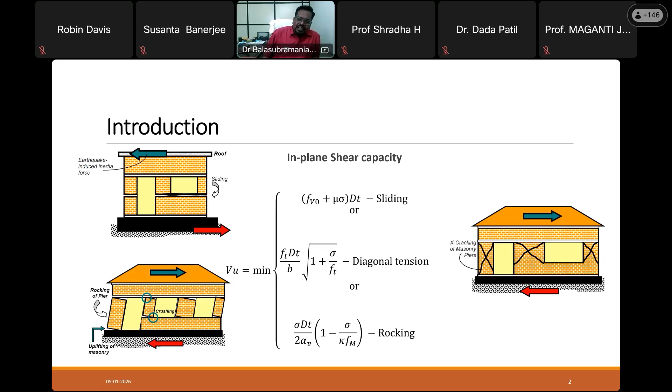These are expressions available in Eurocode, but the basic mechanics behind this failure is as explained.

Now getting into the topic, we need some mechanical properties to properly engineer a structure. On one hand we have the force that's coming, and on the other hand we have some resistance capacities. To understand the resistance capacities, we need determination of the respective strengths. So this determination of mechanical properties is important in the case of seismic analysis.

For seismic analysis, the list of important mechanical properties is listed here: compressive strength of brick masonry—not of the brick or mortar separately, but the compressive strength of the brick masonry—elastic modulus of brick masonry, tensile strength of brick masonry, shear bond strength, bed joint friction coefficient, and coefficient of friction of the brick masonry.

There is also importance in establishing the interdependencies between these mechanical properties. In the case of concrete, if the compressive strength is known, we can indirectly estimate the shear strength, maximum shear strength capacity, and the tensile strength. That is what we mean by interdependencies.

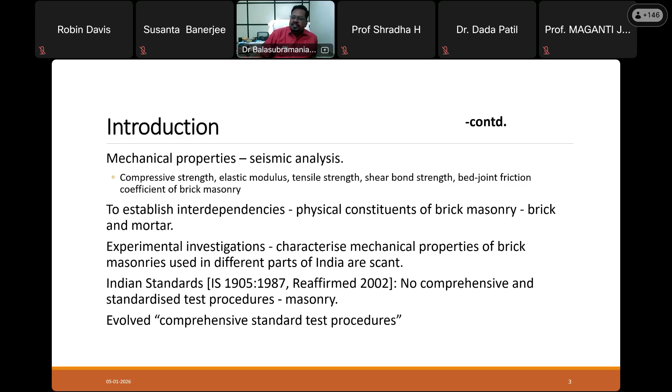And so, we took up a study of getting the comprehensive test procedures for evaluating the brick masonry specimens, and this is going to be part of the topic.

So I was talking about tests on physical constituents - one is test on bricks and test on mortar, and then test on masonry.

So for test on bricks, we have standard test procedures. For test on mortar, masonry mortar, we do not have comprehensive test procedure.

So compressive strength behavior of bricks, water absorption of bricks, and also initial rate of absorption of bricks - for all these, we have procedures.

The initial rate of absorption may be found to be significant, sensitive according to some studies, and some studies talk about water absorption itself being enough, no need for IRA and all. So anyway, that is a different thing.

But what we have is the compressive strength of bricks, water absorption, and IRA - these are there similarly.

But for mortar, which is the second physical constituent, we do not have compressive stress-strain behavior procedure, and we also do not have test on masonry - compressive stress-strain behavior, flexural bond strength, shear bond strength, and then shear strength. Here it has two components: shear bond strength and coefficient of bed joint friction.

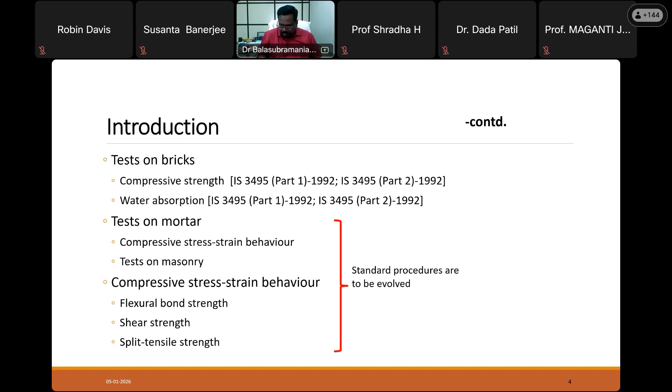I may be going a little slow because considering the vast heterogeneous audience, for some people it may be a little boring, but in order to cater to the nature of the heterogeneous audience, I'm going a little slower here.

Then, as a result, we made a survey of literature and standards that talk about the different tests on the physical constituents as well as the brick masonry as a material. We have identified some standards and also some literature pertaining to India, because that kind of experience will also lead us to a good understanding of the procedure.

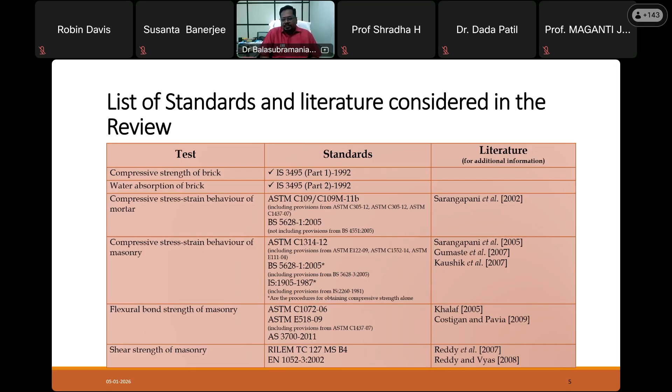Here we are not going to talk about experimental analysis. We are going to talk about how to do the experiment, what is the procedure to be followed, and what is the nuance behind each and every step that we are going to adopt. That is what is going to be covered in my lecture.

So what are the salient aspects of the comprehensive test procedure? There are 9 comprehensive salient aspects: conditioning of brick units, mixing of mortar, type of specimen, number of specimen, fabrication of specimen, capping of load surfaces, curing of specimen, requirements of test equipment and machines, and rate of loading.

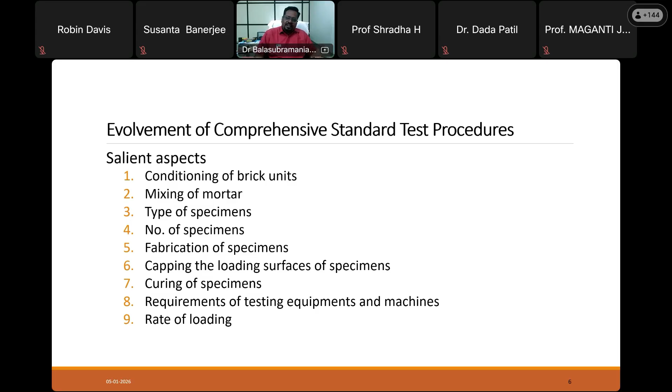Amongst these, some aspects are common to all the mechanical properties that we have discussed. For instance, conditioning of brick units is common whether it is compressive stress and behavior test, shear strength test, or flexure test. Similarly with mixing of mortar, there are some common aspects and then specific aspects. First we will talk about all the common aspects, and then we will discuss the specific aspects.

Okay, this slide has come now. Conditioning of brick units.

Is it visible? Yes sir, yes sir, the slide is visible. Because in my other phone I also logged in, I was seeing it was rolling.

So conditioning of brick units, though it seems simple to understand, if you can understand the masonry's interface, the brick mortar interface, in a better sense, it can come out with producing good masonry.

Some studies have indicated that there are two stages of hydration happening. One is water flow, and another is reversal of water flow. That is, at the time of laying, during construction, we are laying bricks and then mortar and then another layer of bricks. So initially, water content will be there in the mortar, which will flow to the brick. So that is called water flow.

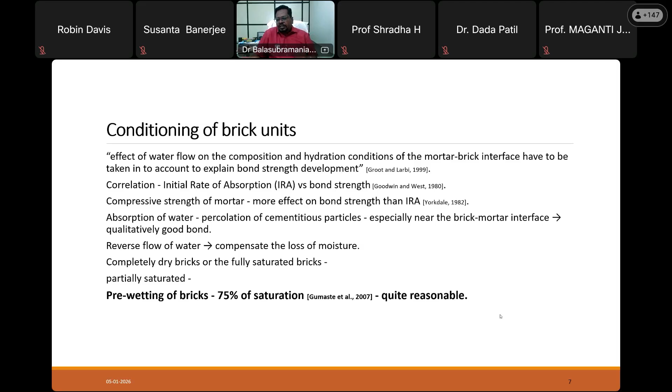So a partial saturation is important. That is why we always use this saturation, pre-wetting. Some studies have indicated that 75% saturation level is seemingly reasonable, which is also understood from the heuristics, it is quite reasonable. So we have to have a partial saturation mechanism suiting this requirement. What we have to do is perform saturation levels for different duration of soaking, and then depending upon that, we can decide what is the better duration for the specific type of brick that we are going to use in our study.

Next is the mixing of mortar. There are two important things. One is workability of the fresh mortar and also maintenance of the same rheology during the entire fabrication. So we have to have a reasonable workability, and the kind of little bit pasty flowing consistency is required. That depends on different types of sand, harshness and the fineness of sand. All that has to be taken into consideration.

So what is the method to determine the workability - mortar flow test, cone penetration test, or slump value test. Mortar flow is the best suitable for this case because it is a simple test and also quite sensitively determines the workability in respect of masonry mortar. So we can carry out this mortar flow test. If it's not available, then we'll have to resort to the slump test itself.

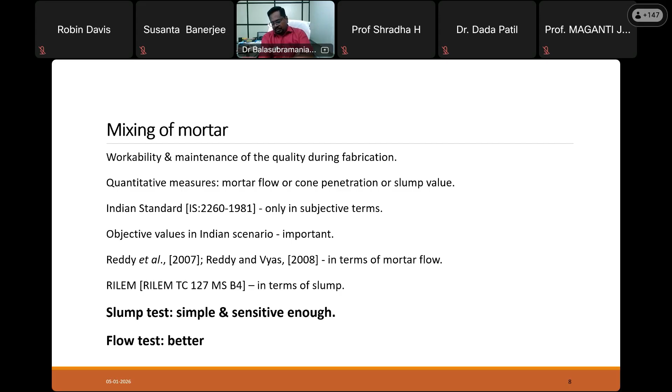And also, I was talking about the second point, which is freshness, or maintaining the rheology during the time of fabrication. For fabricating the specimens, we're using mortar. Initially, it may have some rheology. After some time, the quality changes. So what we have to do is mix the mortar as dry mixes, have a small portion of dry mortar, and then water required has to be ascertained for the specific case. The requisite amount of water has to be added in a single stroke. And then use the mortar within half an hour or so. So supposing if you are using some kind of 5 or 6 kgs or 10 kgs, it should be fine enough for fabricating specimens.

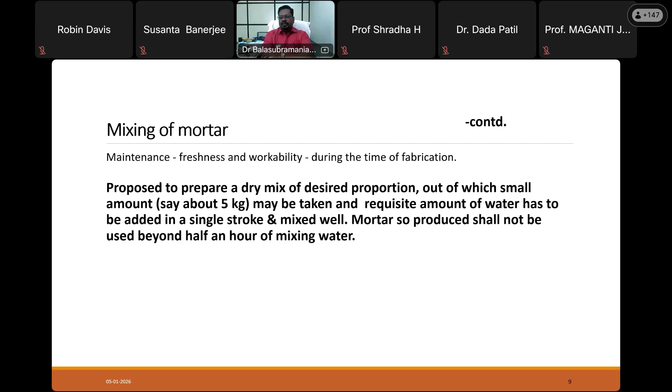Within that half an hour, we can consume it. Beyond that, we shouldn't use it. We have to throw away that mix, and then fresh mortar has to be prepared.

And then number of specimens. In the case of concrete, for some parameters, you would have used some 3 or so. For some parameters, they will resort to 5 specimens. All that depends upon the scatter, the epistemic uncertainty associated with the parameter that we are discussing. If the scatter is more, to have a confident estimate, naturally we need more number of specimens.

At the same time, we cannot have a very high number of specimens for getting higher confident estimates, because we need to strike a balance between the bias of the test statistics as well as cost involved. As a result, we can have an optimal number of specimens required for each and every mechanical property that we have to determine. We have done some works on this. We'll discuss about this in detail while we are getting into that part.

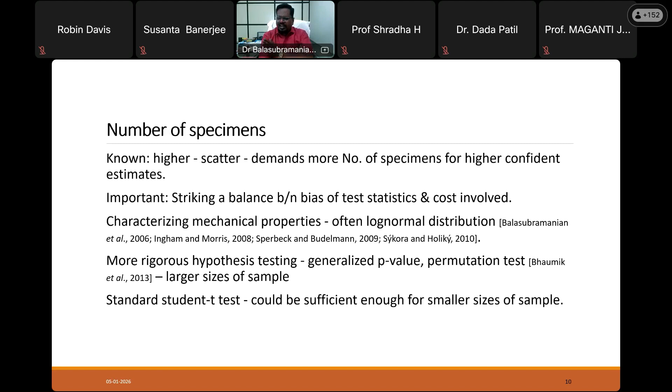As a result, what we have identified is, with increase in specimen and increase in scatter, there was a significant reduction in the length of confidence estimates, and so as a corollary, we increased the number of samples.

So for the case of sample size of 5, we fitted for different cases. Here we are talking about the values, the length of confidence intervals that are reported pertaining to different studies where they have reported the average value and COV in some instances, or in some instances they may not have reported, so we computed it. For a sample size of 5, we obtained the length of confidence interval between 12.91 to 100.

For sample size of 10, it was between 7.44 to 58.08, which is drastically reduced. Similarly, for a sample size of 15, the length of confidence interval further is drastically reduced to 5.75 to 44.97, and beyond that, not much significant reduction. It was simply reducing to 4.86% to 38%.

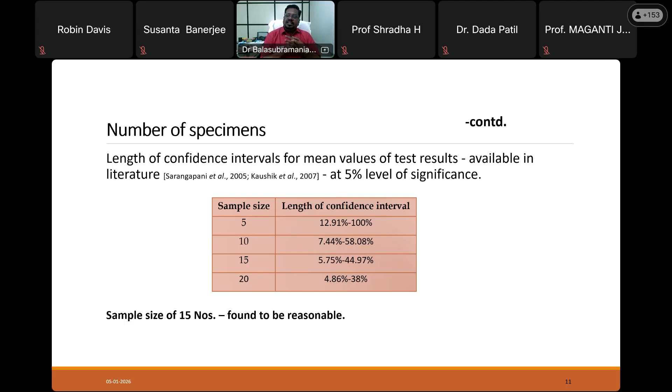So that was the bound. Beyond 15, it wasn't improving much. So with increase in the sample size, the confidence interval was reducing, and beyond that it was not reducing much. So 15 number of samples was found to be reasonable in our study.

Okay, and then the next is fabrication of specimen. In the case of concrete, we use the word called casting, because we have a mold, and a semi-plastic liquid kind of gel, concrete, that we pack into the volume of the mold, and then after drying or hardening, we remove the mold.

But in the case of brick masonry specimens, we have to use the term called fabrication, because we are using some brick and mortar that are arranged in some periodic fashion.

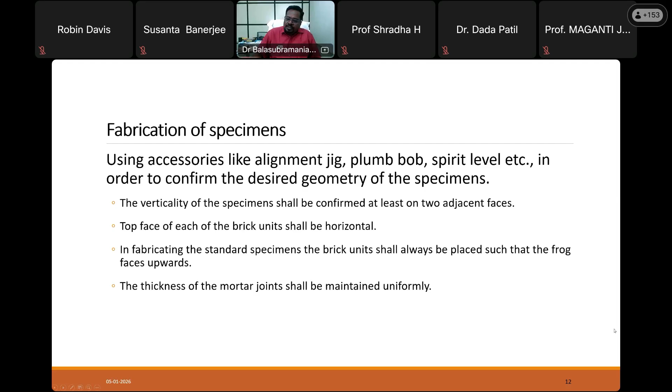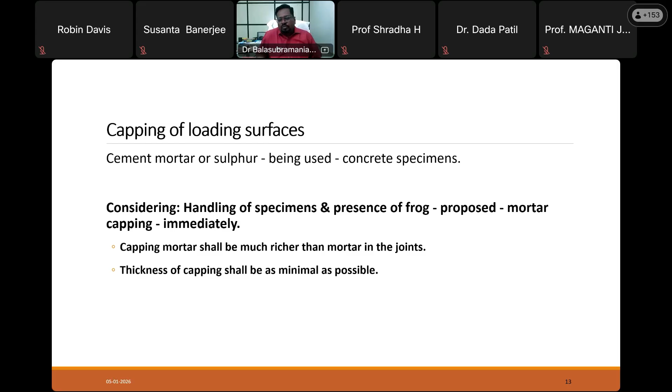And then capping of loading surfaces. Either cement mortar or sulfur is being used for concrete specimens, but in the case of brick masonry specimens, capping has to be done with mortar which is much richer than the bed joint mortar that we are going to use in the study. And the thickness of the capping also should be kept as minimal as possible, just enough to fill the undulations. That's what the condition is.

And then next is curing of specimen, because curing plays an important role in attaining the hydration of the mortar, as well as the formation of a good brick mortar interface. Not only workability, curing also plays an important role in forming this quality brick mortar interface. There are many methods for normal curing of brick masonry.

So, for instance, British and Australian standards simply cover the specimen with moisture tight bags, and keep them undisturbed. American standards also keep the specimens with moisture tight bags, but place them in temperature controlled humidity chambers.

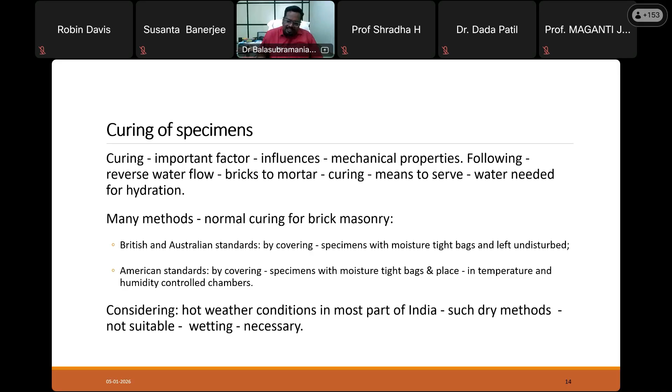But considering the hot weather conditions in most parts of India, such dry methods may not be suitable. So what we have to do is either wet the specimen using gunny bags or submerge it under water. In the initial stages, say the first week or so, the watering has to be done at much closer intervals.

So the mortar gets hydrated properly in the initial phase, and beyond that the hydration rate will be lower - that's the reason I'm talking about this. Beyond 7 or 8 days, the hydration rate will be low, so we can reduce the watering. Alternatively, for the first few days we can keep the specimen soaked under water, and beyond that place the specimen covered with moist gunny bags.

But if we are using the soaking underwater method, we will have to place 2 bricks on top of the specimen. This is to have some minimal compressive stress, so that the soaking doesn't separate the specimens. In some cases, if we keep the specimen underwater for a long time without any such pre-compression, separations have happened.

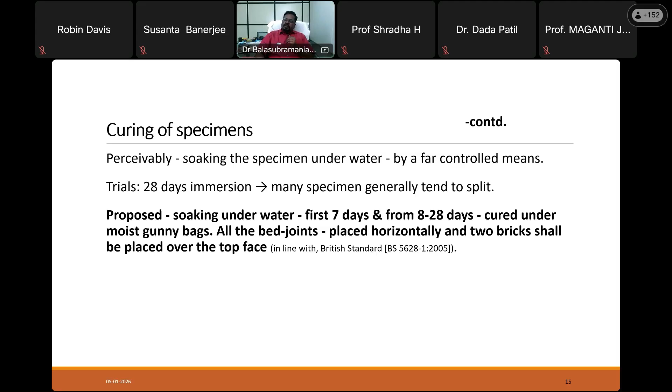Now, all these aspects we have discussed so far are common aspects. Now we are getting into the specific aspects - the compressive stress-strain behavior of masonry. For this, there are different specimens used in the literature: one is stack bonded prism, and the other one is wallettes.

I'll show the stack bond prism figure later, and then wallets. Stack bonded prisms are suggested in ASTM, wallets are suggested in British standards, and also in the Indian standard 1905 for determining compressive strength.

So here we are talking about compressive stress strain behavior, that is the stress-strain relation. The entire stress strain curve has to be plotted, because that is required to determine the elastic modulus. The 1905 present code suggests this stack bond prism.

Stack bond prism means we are laying one brick above the other with mortar in between. So a 5 brick stack bond prism means 5 bricks will be there, with 4 mortar interfaces in between, and the top and bottom faces will be high rich mortar capping. The aspect ratio is the height to least lateral dimension ratio, which is 2 to 5 as per the code.

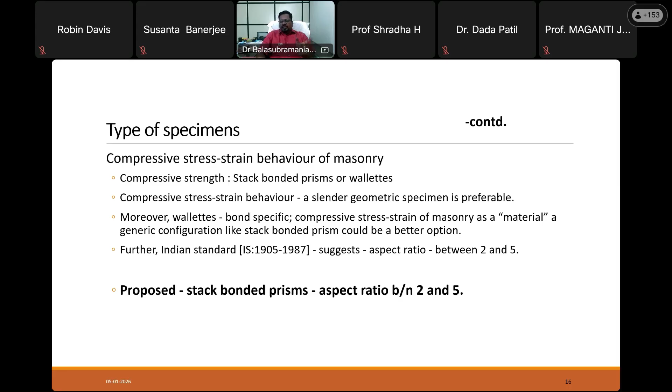We also felt that stack bonded prisms are generic ones, whereas in the case of wallettes, to fabricate a wallette we adopt some bond patterns, like English bond or Flemish bond or different types of bonds. So the test results would also be applicable to the specific type of bond. So in order to have a generic specimen, it's better to go for the stack bond prism.

For compressive stress strain behavior of mortar - for compressive stress alone we can use cube specimens, but as I told, we need compressive stress strain behavior so that we can get the elastic modulus of mortar also. Elastic modulus of bricks and elastic modulus of mortar are required, so that when characterizing masonry as a material, we will use either mathematical homogenization or any other technique. For that, we need the elastic modulus of both physical constituents, and for that we need compressive stress strain behavior.

So for mortar, we have to get the compressive stress strain relation. For getting this, we can use a cylindrical specimen of say 150 mm diameter and 305 mm height, or we may even use 100 mm diameter and 150 mm height specimens.

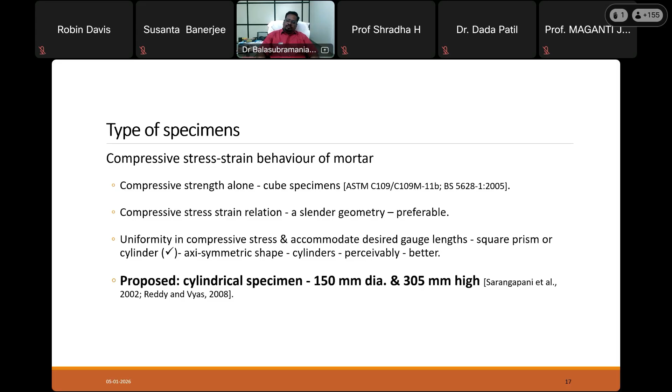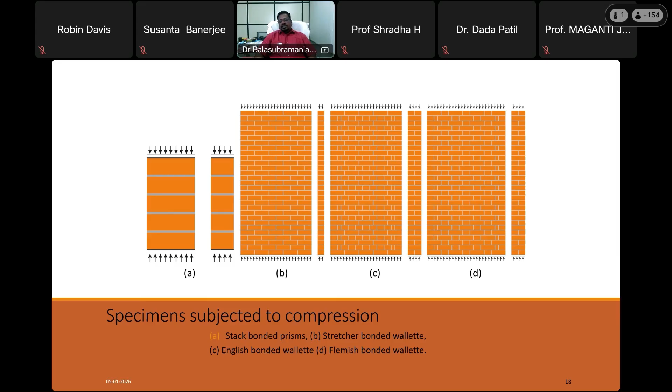So when we are testing the specimen, the results of the masonry will be specific to the respective bond pattern. But this stack bond prism is a generic specimen, and then type of specimen for performing the flexural bond strength of masonry.

For determining the flexural bond strength of masonry, either prisms or wallettes have been used in the past. Sorry for the inconvenience, one more minute.

Either prisms or wallettes can be used in the case of bond strength also, and depending upon the application of mode, there are different ways. One, either a bond wrench test or 2-point bending test can be adopted. I'll show you typical things.

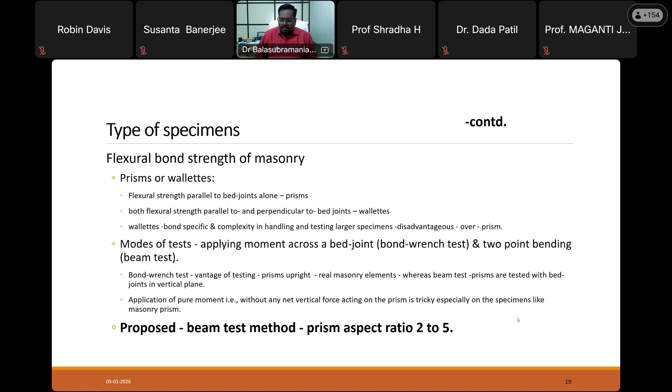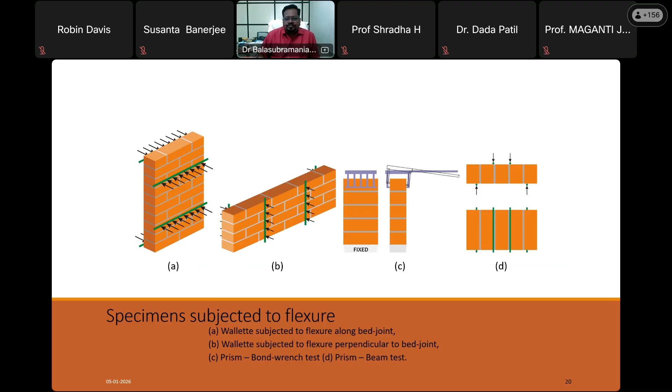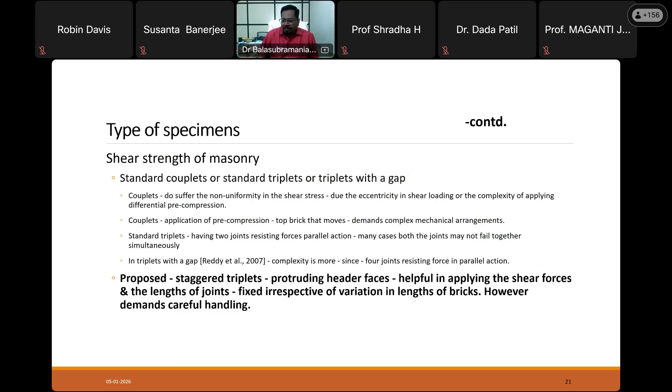So this is the case of the flexural bond strength of masonry. The next case is the shear strength of masonry. For that, there are standard couplets, standard triplets, and triplets with a gap. I'll just take you to the figures here.

If you remember that expression, there will be shear bond strength plus coefficient of friction times the normal pre-compressive load, pre-compressive stress, right? So from those values only we can construct the Mohr failure envelope, and from that we can get the shear bond strength as well as the coefficient of friction. Shear bond strength will be nothing but the y-intercept of the Mohr-Coulomb failure envelope, and coefficient of friction will be nothing but the slope of the Mohr-Coulomb failure envelope.

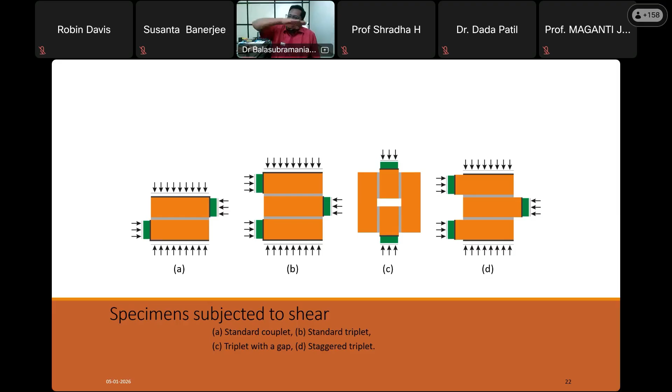So different levels of pre-compression, say 3 or 4 levels, can be given and the shear capacity in the lateral direction obtained. To get the 2 or 3 levels of pre-compression, we can perform the test and get the shear strength values, and construct the failure envelope. From that we can indirectly get the shear bond strength as well as the coefficient of friction.

Next one is the compressive strength behavior, for requirement of testing equipments and machines. So far we are talking about different types of specimens. Now we are talking about the different testing equipment requirements. In the case of compressive stress-strain behavior of mortar, you all know for concrete we are having this compressometer, right?

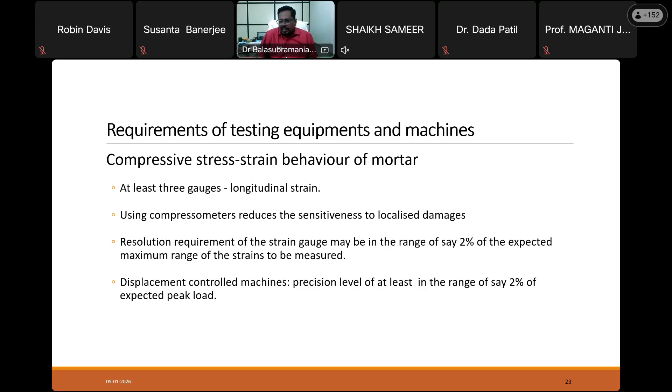Similarly, the range of the strain gauge we are using should be at least sensitive enough to say 2% of the expected maximum strain range. And for carrying out the test, we have to use displacement-controlled type machines with a precision level of at least 2% of the expected peak load. This is the criteria we have to ensure for carrying out this test.

And then for compressive stress-strain behavior of masonry, apart from the case of mortar, additionally we have two important aspects to consider. We have to have a gauge length, and then...

In the case of mortar, I can have different gauge lengths. But in the case of masonry specimens, the gauge length should be in terms of multiples of the representative volume element, in order to totally reflect the volume of masonry and the volume of the gauge. The portion of masonry within the gauge has to be representative of the periodicity of fabrication.

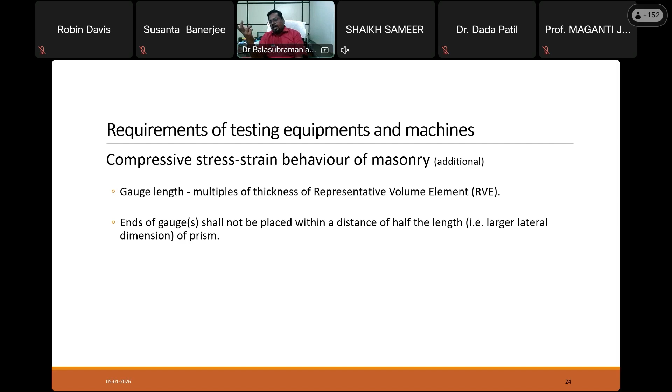We have a half-thick bed joint, then a brick, and a half-thick bed joint below. This is one representative volume element, because if we repeat this representative volume element periodically one above the other, we can obtain the specimen. This is what we call the periodicity element, the representative volume element.

So the gauge length has to be decided based on the height of the representative volume element, and it should be in multiples. This is unlike concrete, because here the representative volume element size and the specimen size are more or less not much differentiated.

In the case of mortar, the sand particle sizes are much smaller compared to the volume of the specimen. But in the case of masonry, the volume of the specimen is significant. Because of that, we restrict this criteria, so the height of the gauge length should be in terms of multiples of representative volume elements.

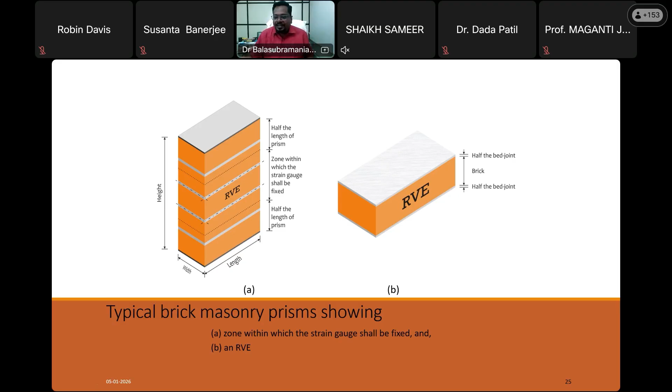We have to have rectangular shaped ones so that the planes of the compressometer and the planes of the prism are parallel, and we have to have more LVDTs across its periphery to cater to both compression and any overturning effects.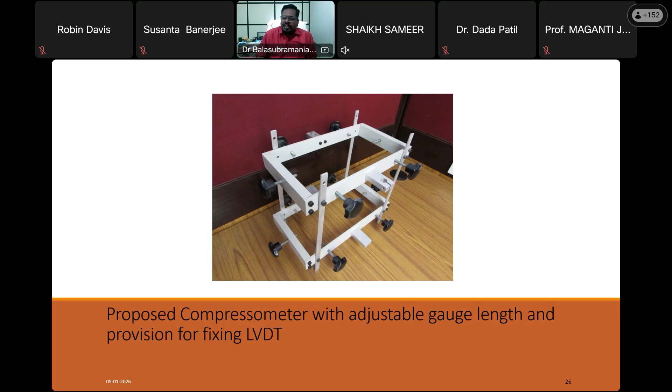In this typical setup, I have shown the compressometer with two LVDTs fitted, but it will require at least 4 or 6 LVDTs, or any other strain measuring equipment, to be adopted — a minimum of 4 or 6, in even numbers. Two is not sufficient; either 4 or 6 strain gauge measuring units have to be used.

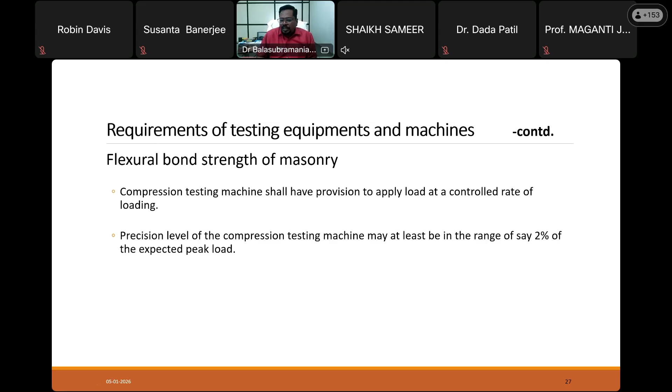For testing requirements of flexural bond strength, we can carry out the beam test using the compression testing machine, but the precision of the testing machine has to be at least 2% of the expected peak load.

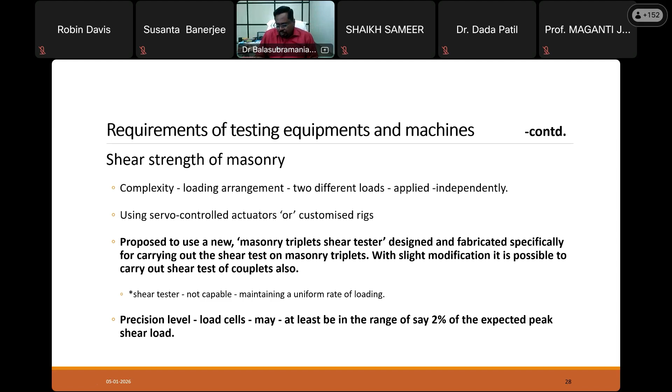For shear strength of masonry, the case is different because this is a complex loading arrangement. One is the vertical pre-compression, another is the lateral load, as we have seen in the figure. To simulate that condition, people have used servo-controlled actuators.

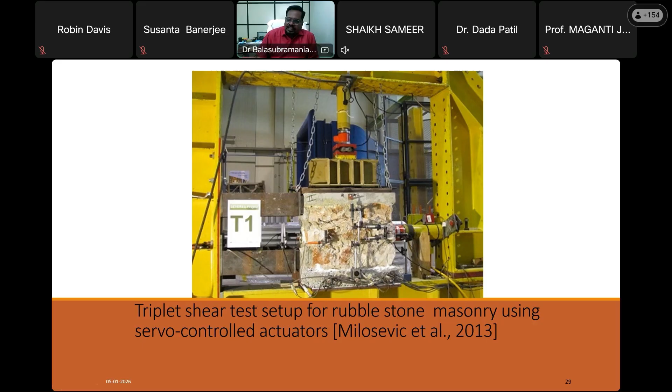This is a case of a stone masonry specimen where servo-controlled actuators have been used in vertical and horizontal directions. The vertical one controls the pre-compression, and the lateral one applies the shear force in a monotonically increasing fashion, from which you obtain the shear capacity.

But this type of setup may be suitable in the case of brick masonry where bricks are very strong and stiff compared to the mortar.

In the case of bricks that are relatively stronger and stiffer, the effect of dilatation will be smaller, because the volume of brick in the specimen is higher compared to that of the mortar, isn't it?

So if the mortar dilates, it's not a problem. But if the brick dilates, the quantum of dilation will be significant. In the case of bricks being significantly weaker and more flexible compared to mortar, the bricks will be subjected to compression, and as a result, the dilatation will be significant.

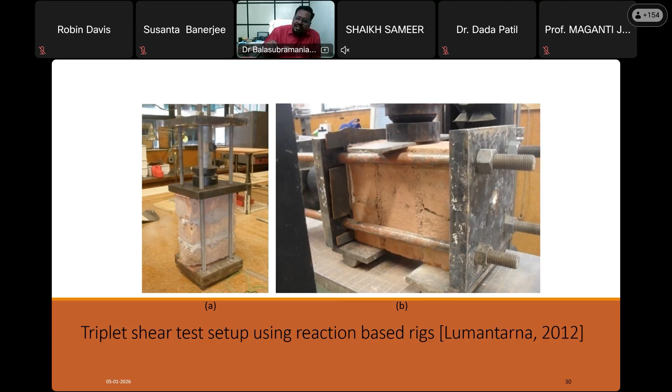This means that when we apply the lateral load, the specimen will expand laterally, but since it's already restrained, there will be a significant increase in the pre-compression. So to get a constant level of pre-compression, we need to control the load either using the first case, as I showed, a servo control actuator, or we can use simple gravity for the load.

If the load is applied by gravity, the dilatation will be allowed. If the specimen dilates and increases in volume, the weights will go to the new position. Unlike the case of restraint, if we are applying pre-compression by weight, the weight will remain the same throughout the time duration of the lateral loading.

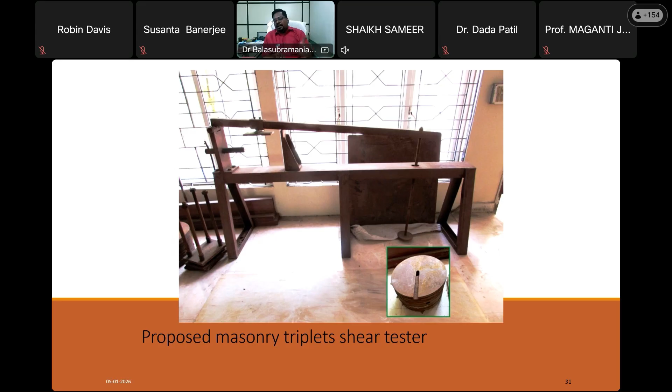Next, I will show some figures of testing that will throw more light on that.

For rate of loading, there are normally two ways of applying compressive stresses. One is capacity determination, the other is stress-strain relation. For capacity determination, we need to carry out the test at a faster pace to get the maximum value. For stress-strain relation, we need to do the test in a relatively slower fashion.

So that neither creep effects will be reflected, nor we will miss the post-peak behavior. So we have to strike a balance between these two cases, and determine the strain rate accordingly.

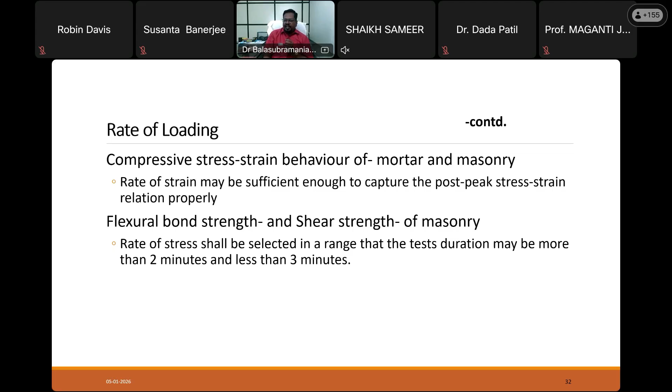So far we have discussed how to do this procedure, and using the devised procedure, we have carried out some tests in our lab. I will just go through that so that we can throw light on it.

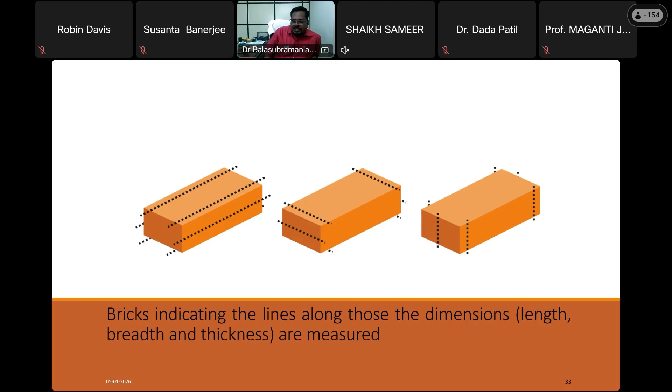Because we are not just restricting ourselves to obtaining the strengths, we will also be keen later on to map these mechanical properties of masonry with the physical mechanical properties of bricks and mortar. For that purpose, this is the water absorption test, and this is the compression strength test.

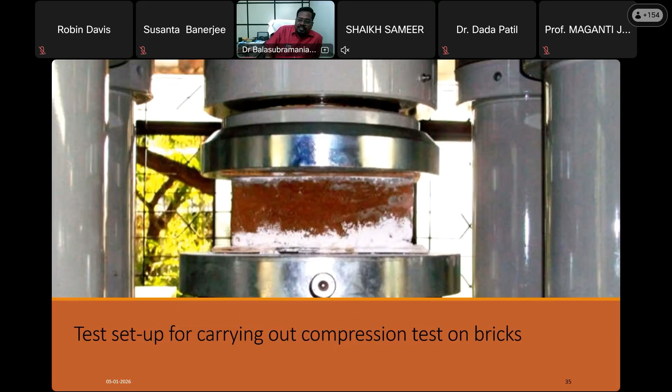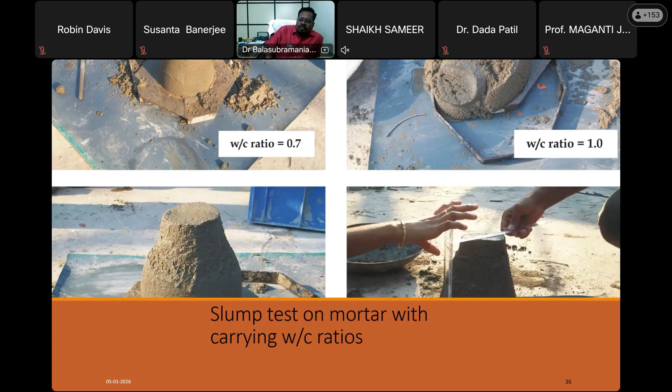Here we have carried out flow test we have carried out separately, but I have shown only the slump test. So for varied water content, we have obtained that slump. Somewhere around say 0.85 or so, it was coming better.

This is preparation of mortar specimens for compression stress strain behavior.

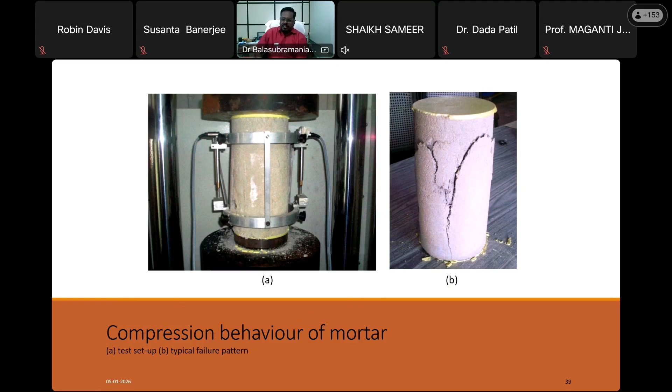Experimental setup. Here also you can see this columnar kind of failure, that is, initially near the edges these shear cracks form, and then spall out. The spalling will happen.

This is the standard brick masonry prism. How to fabricate, right? I showed you at every level the horizontalness has to be ensured.

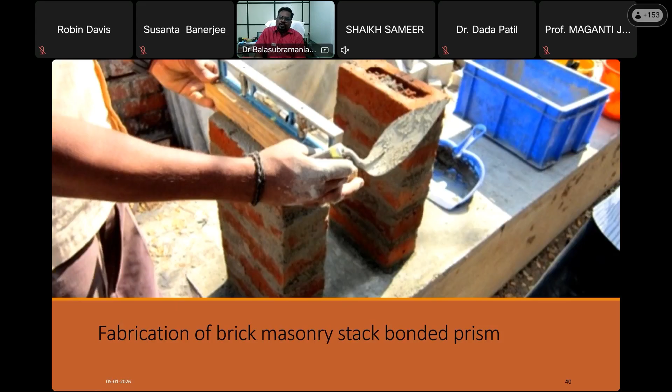This is the first stage of curing that we carried out, and then the second phase after 1 week. We used gunny bags for curing.

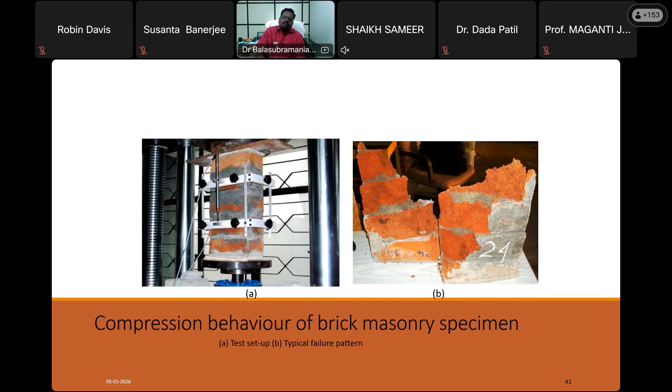And this is the compressive stress strain relation for masonry test. The standard prisms were subjected to monotonically increasing displacement. We used a displacement control machine, and then we obtained the stress strain relation.

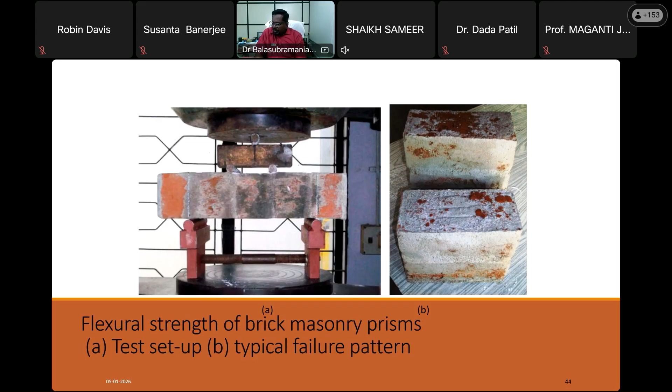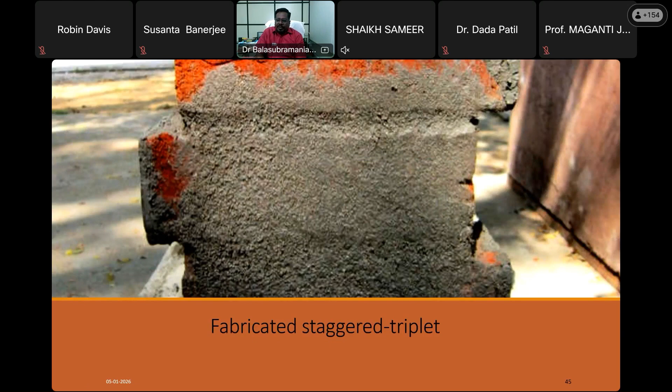This is the flexural bond strength test, carried out by 4-point bending, and this is the staggered triplet that I talked about for determining the shear strength test.

So to have a 1 ton load, say we need not have to load 1 ton quantity of disc weight. We can reduce the weight required at the hanger point, which is, here we have this lever arm ratio. So depending upon the lever arm ratio, we can determine the load.

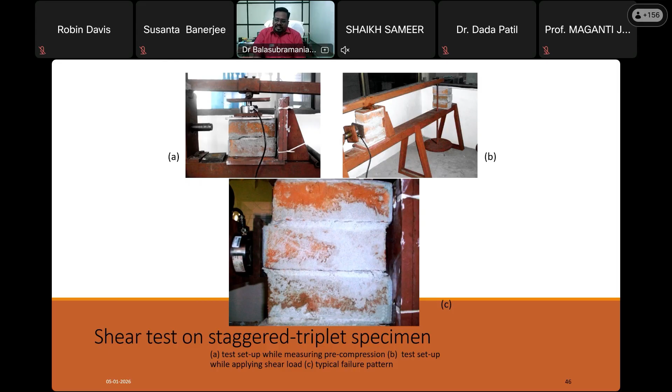This next one is a split tension test. This is a relatively new kind of test. People have been using diagonal tension on wallette specimens, so this is an alternate to that.

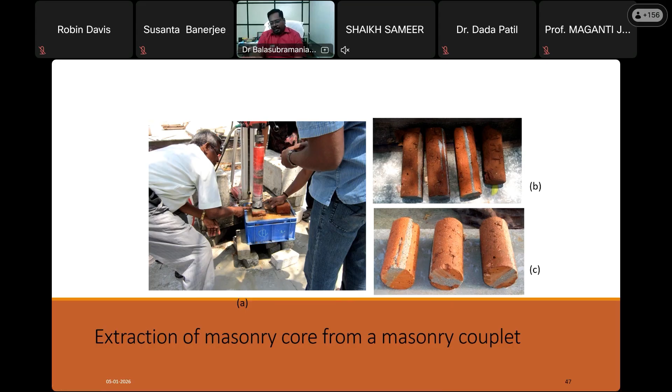So to that level we can trim and then carry out this split tension test using the compression testing machine with the inclined bed joint, because we are talking about diagonal tension, right? So diagonal tension failure actually depends upon the direction.

As I told you, it will initiate in the middle and extends to the periphery. So the crack lines will be inclined to the crack lines. The diagonal tension crack line will be inclined to the bed joint.

So accordingly, depending upon the pier's length to height ratio, or this thing, we can determine the angle of the bed joint and then carry out. Typically, or generically, we can use a 45-degree angle bed joint and carry out the test.

Based on that, we can obtain the split tensile strength for the 45-degree angle, and then beyond that, supposing if there is any requirement for change for different angle, we have to theoretically compare. This can be obtained later on based on homogenization techniques we can perform and then correlate the angle sensitivity later on using expressions.

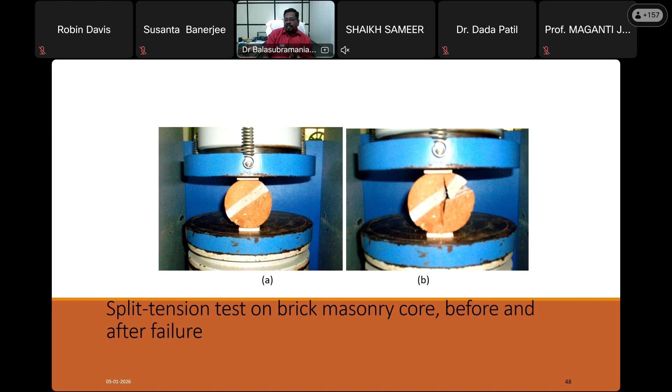But for the time being, we need some standard values. So this is what we proposed, and then these are all the results of those tests.

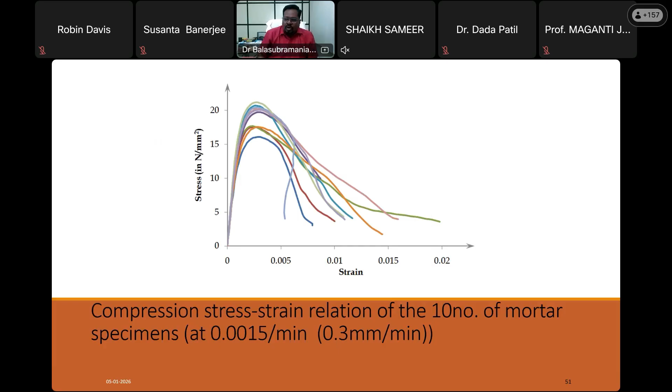I'll just explain how to interpret also. Here, this is the stress strain relation curve, absolute stress strain relation curve of some mortar joint specimens. This is the absolute stress strain relation of the masonry specimen. We used something around 15 specimens.

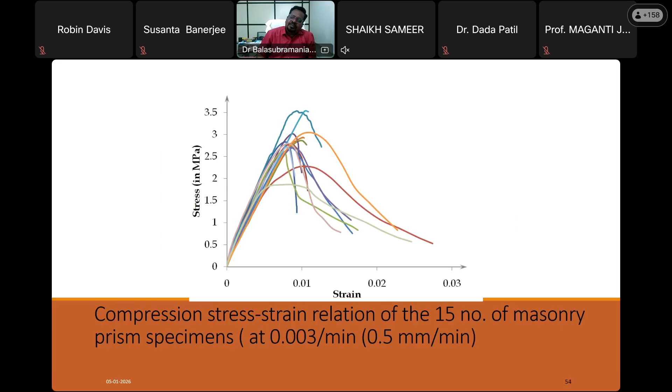We carried out the test at 0.5 mm per minute displacement rate, strain rate of 0.003 per minute. By adopting this for 15 specimens, we obtained this stress strain relation.

This is absolute scale, and then we normalized that. With respect to the peak load and the strain corresponding to the peak load, that scattered curve, we normalized them to this fashion. Now one can easily understand how to characterize, right? So by this means of normalizing with respect to the peak load and the corresponding strain, we can get the normalized strain curve and typically characterize this strain relation.

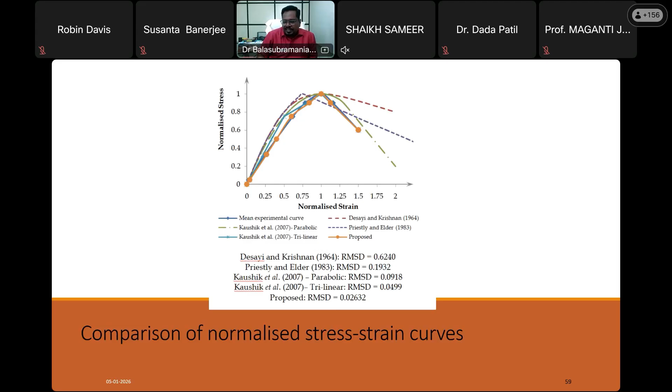And then normalized strain relation. From that, we compared with the different proposed stress-strain relations and made some statistical studies on that. So this is all about what I was trying to tell you regarding determining mechanical properties from stress.

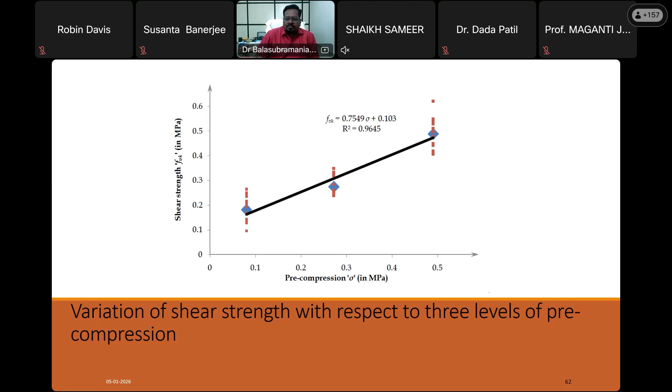Supposing if you are testing wallette specimen, the values will be different.

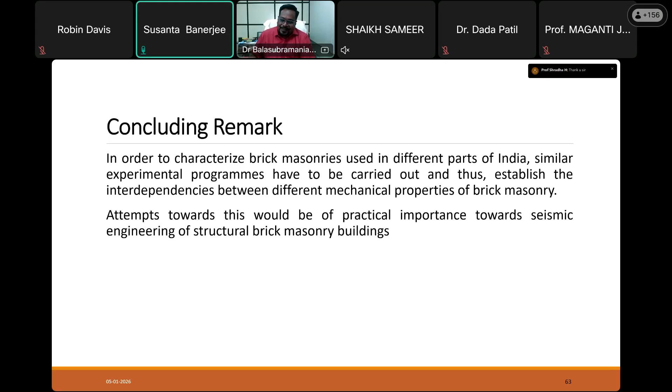I also attended one of your courses in January this year, and it was really informative. I would also like to invite participants, if you could visit maybe on an open day or when other programs are organized, they can visit the SERC, and we'll be pleased to show the top-notch research.

Sir, could you please stop sharing for a moment? The controller has removed that. Okay sir, just for one minute. Maybe we can take a photo. We'd like to present you a small token of thanks from our side, sir. Please accept. Accepted, thank you, nice. Okay sir, thank you, we'll be in touch. Good night, sir, good night.